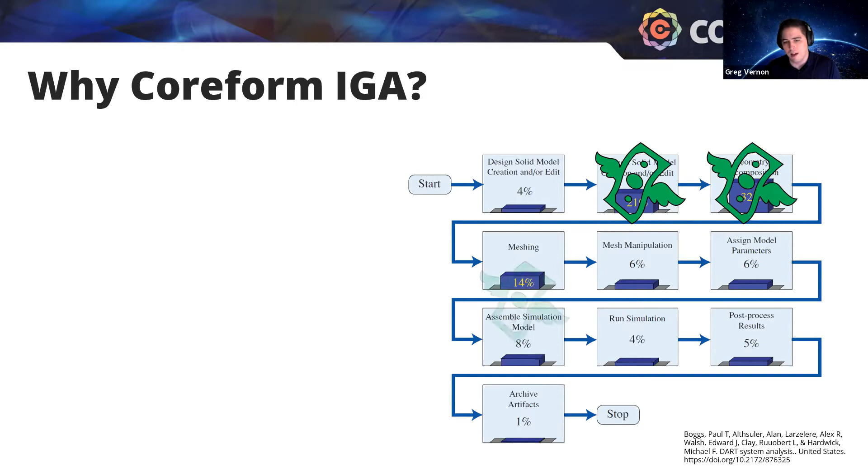They're taking a design model and then de-featuring it to make an analysis solid model, or in order to prepare it for hex meshing, having to decompose the geometry. Then the actual process of trying to build a hex mesh and iterating on that, and then making sure it's a quality mesh. So these portions of the pre-processing workflow really aren't value added—they're just time spent trying to get a simulation ready to go. IGA, and Coreform IGA in particular, our motivation is to drive those portions of the workflow to effectively zero, and let the analysts decide and have full control over how much time they actually spend in those parts.

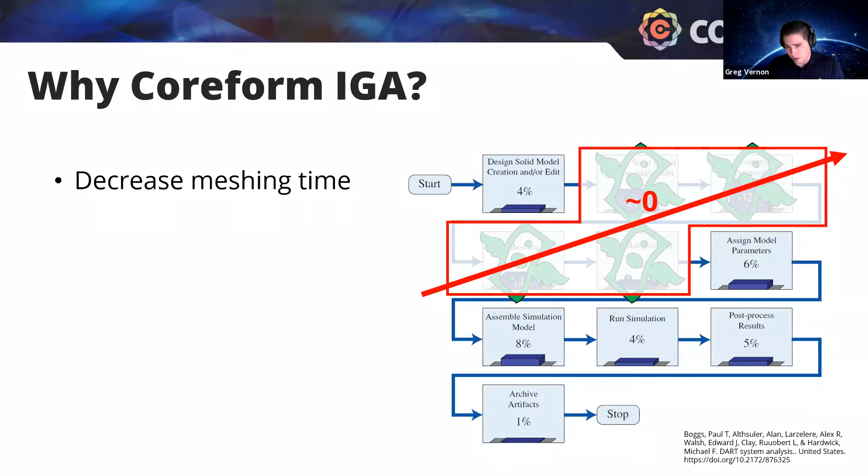One of the biggest ways we can do that is by decreasing the overall meshing time and relaxing the constraints that lead to those expenditures in meshing and pre-processing. We can do this largely due to technology Coreform developed that allows us to increase your simulation accuracy through spline basis functions.

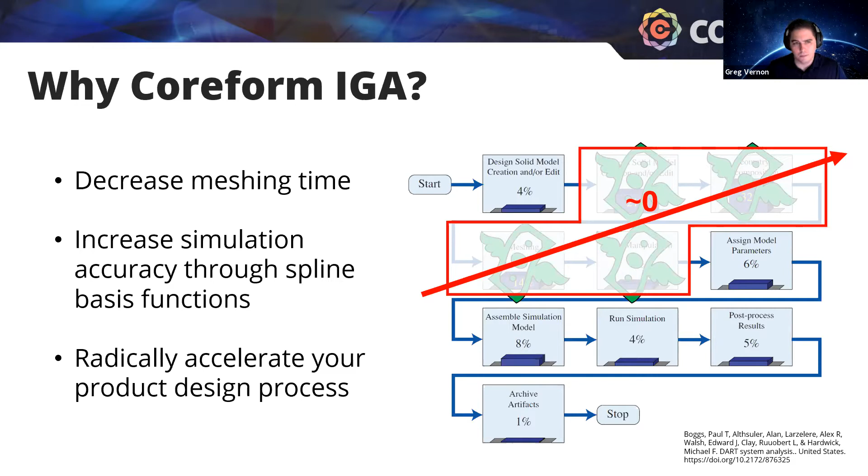And if you put all these things together, the real business value or goal is that you can radically accelerate your product design process. So really, Coreform IGA is about being a business tool.

If we look at where it fits within the realm of simulation tools, we can categorize solver technologies by their overall time to solution, being either slower or faster, and their accuracy, from low accuracy to high accuracy. There's value to having low accuracy in early stage design cycles, and there's also still value in having high accuracy.

If you look at the traditional finite element approaches, hex-based FEA versus tet-based FEA, hex-based FEA is typically more accurate than tet-based FEA, but it requires more time to get to a solution due to the manual labor required to build hex meshes. Tet-based FEA is faster overall, but it can be computationally more expensive, so it isn't as fast to go, and you give up some accuracy.

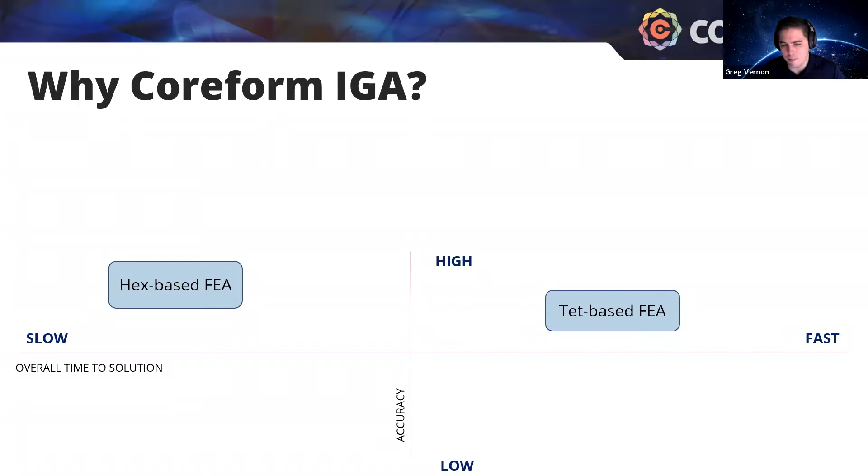We've seen recently more methods being developed, like meshless methods and voxel-based methods, that sacrifice accuracy in the name of more speed.

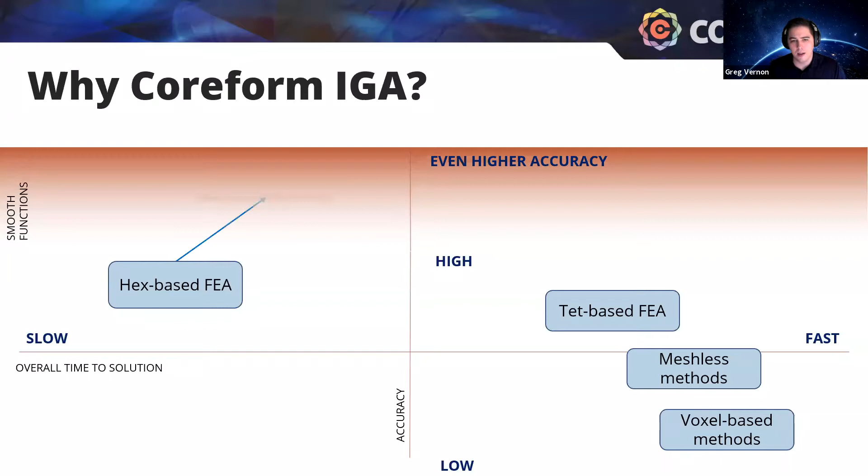Now, Coreform IGA is developing a tool with higher order smooth basis functions, which allow it to have even higher accuracy. With traditional body-fitted U-splines, which is our patent-pending spline technology, we can either take hex-based FEA and make it more accurate and faster to solve, or we've now developed these immersed spline technologies, which allow us to have the speed of meshless methods, but with the accuracy of hex-based FEA, or improved, in fact.

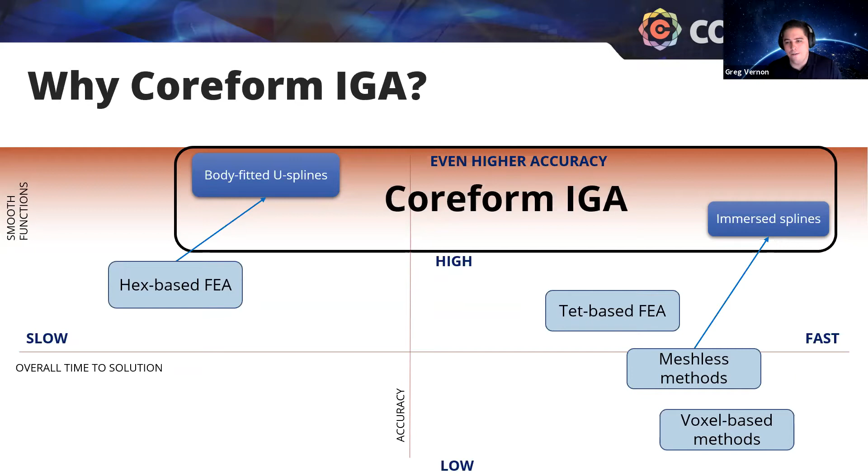So this is kind of the spectrum or location where Coreform IGA is designed to live in: highly accurate solutions that cover the entire spectrum, from a lot of model prep time for the most accurate solutions, to fast solutions with their immersed splines.

I want to dig into this spectrum a bit. If we lay it down, on the left we have traditional finite element approaches, which typically have more manual labor involved but result in faster solves for nonlinear problems. On the other end, traditional immersed methods have less manual labor, but the solves may be more computationally expensive.

On the left, traditional FEA with hexes requires manual labor to defeature. We'll see some fillets defeatured here, then decompose to put on a hex mesh. Traditional immersed methods just fully immerse the geometry without defeaturing, so here we can see these complex fillets and chamfers, and we rely on the computer doing some adaptivity and more work to get out accuracy.

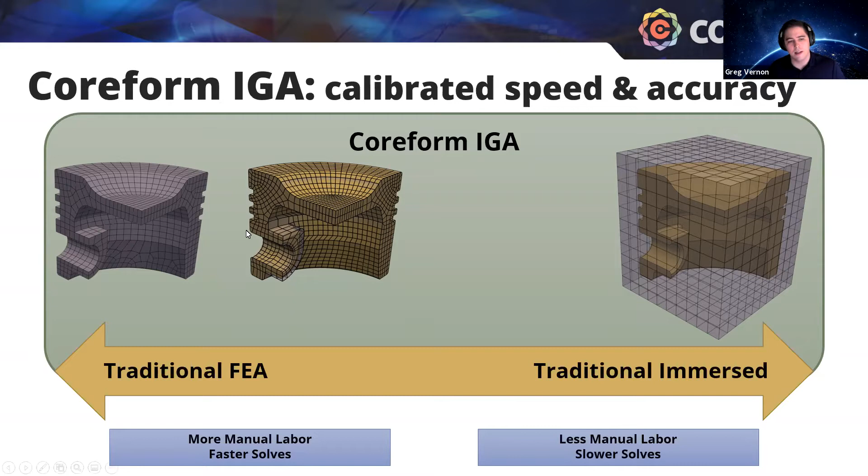What we've developed is the ability to identify the regions that are difficult to mesh, and only in those regions relax the requirement to be body fitted, while still being largely body fitted in most areas. Or, if an analyst chooses, we can fit just the major features of the geometry, in this case the symmetry planes, the top and bottom surfaces, and the outer radius, then allow the computer to adapt to get out the solution.

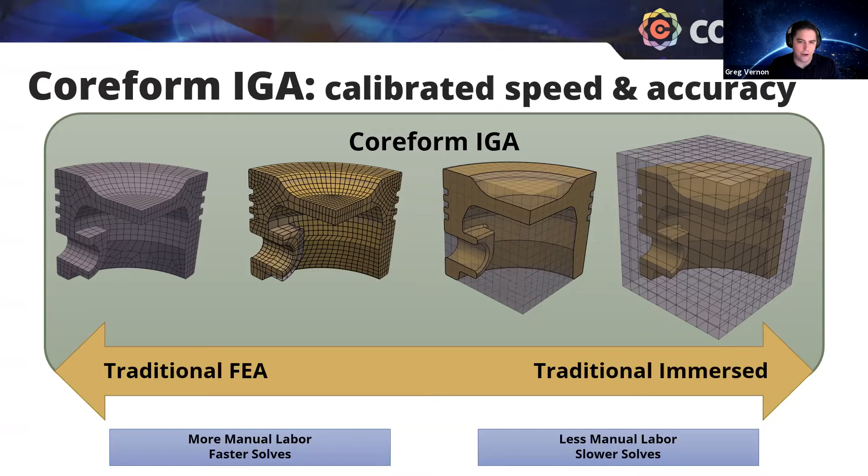So really, what we've done now is give the analyst the ability to choose, for each component in their model, what level of accuracy and computational expense they need to get out their solution. It's full flexibility provided to the user.

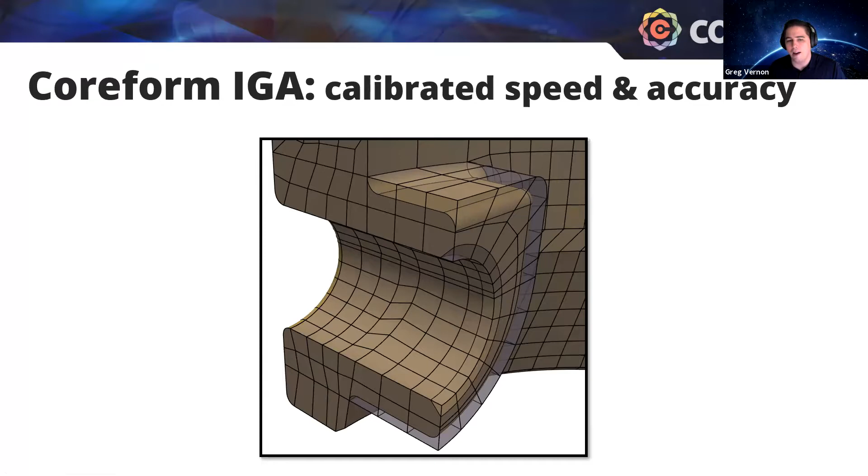If we look at that second option from the left, I want to show the detail where we are body fitted on most of this geometry. But what makes this geometry difficult, if not almost impossible, to hex mesh without defeaturing are these fillets, especially these complex fillets on the shoulders. So we relaxed the requirement of body fitting in those local regions, and use the local adaptivity properties of our U-spline technology to drive accuracy to whatever level the analyst requires.

And so, as you can see, with this approach, isogeometric analysis, we've now got this tight CAD connection to the design geometry. We've got greater accuracy per degree of freedom due to our use of spline basis functions, but also the ability to have partially body fitted meshes that are relaxed, immersing just certain regions. This results in more efficient compute. Overall, we've now calibrated, or allowed the user to calibrate, the speed and accuracy trade-off they need for their problems.

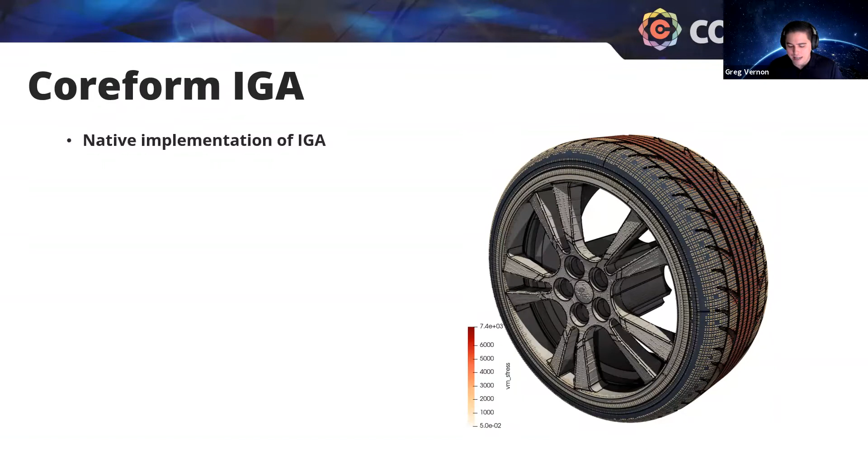Now, Coreform IGA is built on decades of research in finite elements and isogeometric analysis. It is still under development, but we're making great progress. So what I'm going to show you today is the latest updates we've done to Coreform IGA with our strategic partners. But I wanted to give you some insight to the current capabilities of Coreform IGA, but also a bit of the vision. So Coreform IGA is a native implementation of IGA, taking these decades of research and putting it into a native solver.

We support both linear and nonlinear solvers, static and dynamic physics, using both implicit and explicit time integration techniques. We support nonlinear materials, geometry, contact, and more nonlinearities are coming.

Some of the mechanical engineers in the world who have nightmares about Fortran might be happy to hear that our user materials and user subroutines are implemented in Julia. And then currently our input files are encoded in JSON, which is a human readable format and is highly structured.

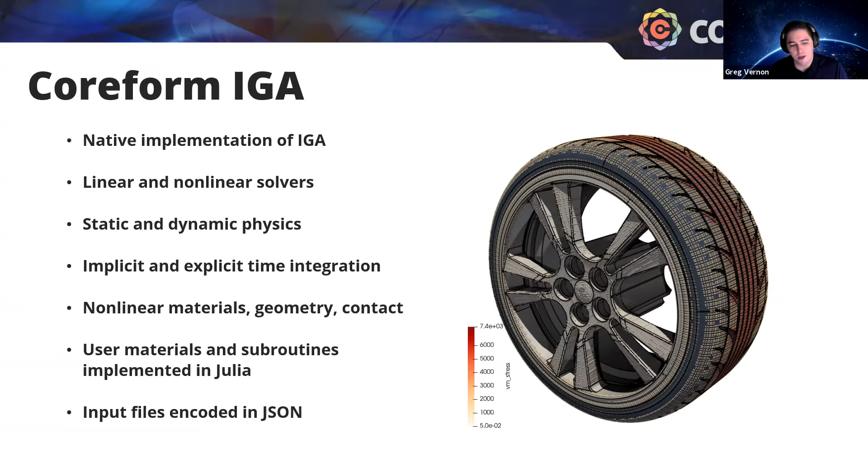So I'd like to, just before we dive into our demonstration of using Coreform IGA to predict failure, take a moment to see if there are any questions about what I've talked about so far. Matt, are there any questions in the queue? You can go ahead, Greg. Right.

Undergraduate textbooks typically allow you to have hand calculations, they're amenable to hand calculations, and then it allows you to test and verify against your finite element solution. So this was actually one of the first problems I ran when I was a new engineer with finite elements, just to make sure that I was understanding it.

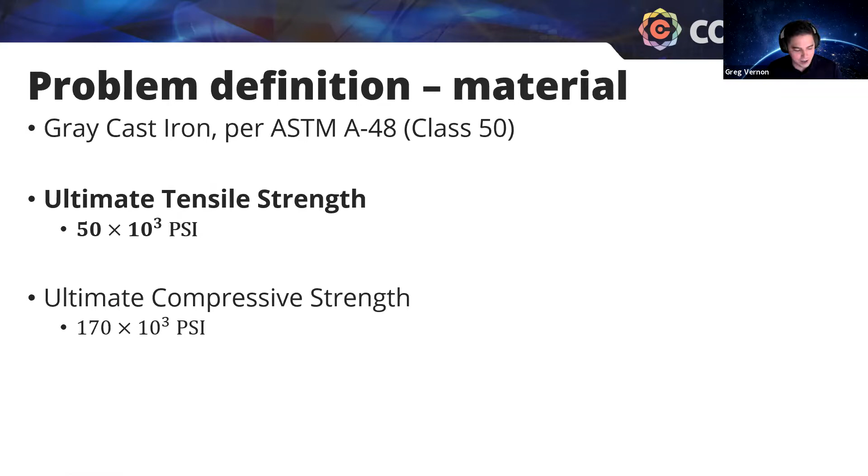And so, as I mentioned, we're using the gray cast iron here, which has an ultimate tensile strength of 50,000 psi. I apologize to our metric friends out there that I'll be using the English system for this analysis. Maybe someday we can all get onto metric for everything, but for today we'll be showing this in English.

Now, gray cast iron follows a brittle material failure. I don't have to remind everyone about this, but just to go through it: if you recall, brittle materials typically don't have a lot of plastic strain before they fail. So the ultimate stress is typically equivalent to the fracture stress, and that's usually very shortly after yield. And if you look at the max normal stress theory, we do see that cast iron does follow this model, whereby whenever the maximum tensile stress, or normal stress, exceeds the ultimate stress value, we have failure.

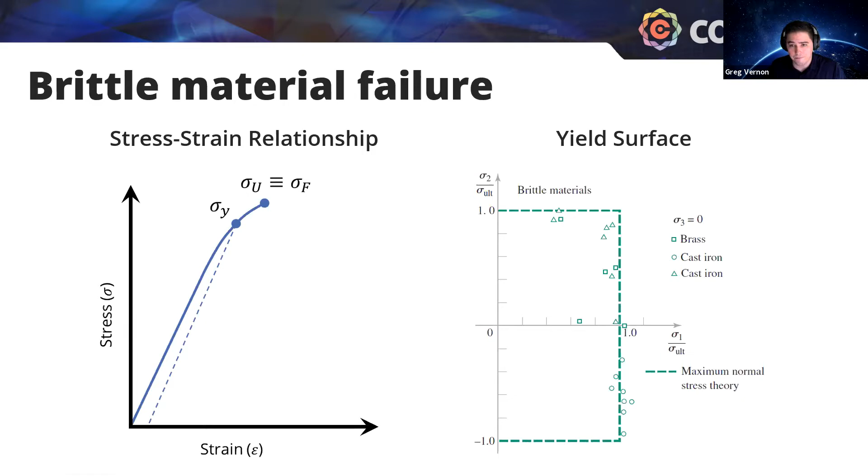So we're going to use the maximum principal stress here as our criteria for failure. And again, as I mentioned, this is a good practice for any engineer to do when doing finite element analysis: to also do hand calculations.

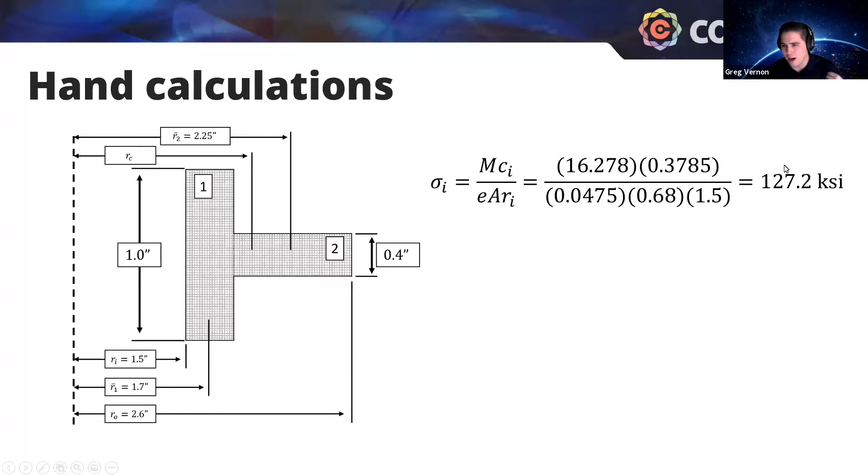As you can see here, even if you've been provided geometry with fillets, you'd still probably idealize it down to this simplified geometry of two rectangular sections. Then we can compute the maximum stress at this interior point through curved beam bending equations. We get 127.2 thousand PSI.

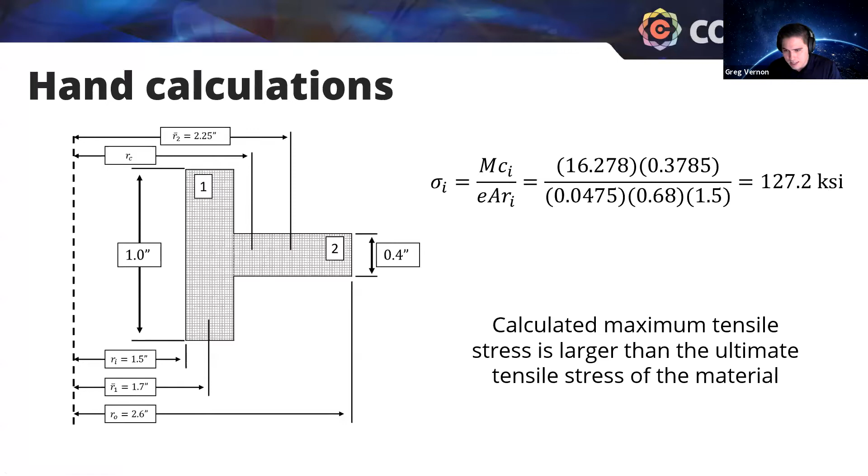Based on our previous assumption of gray cast iron, that maximum tensile stress is larger than ultimate tensile stress, and so we would predict failure. In fact, we predict failure by quite a bit.

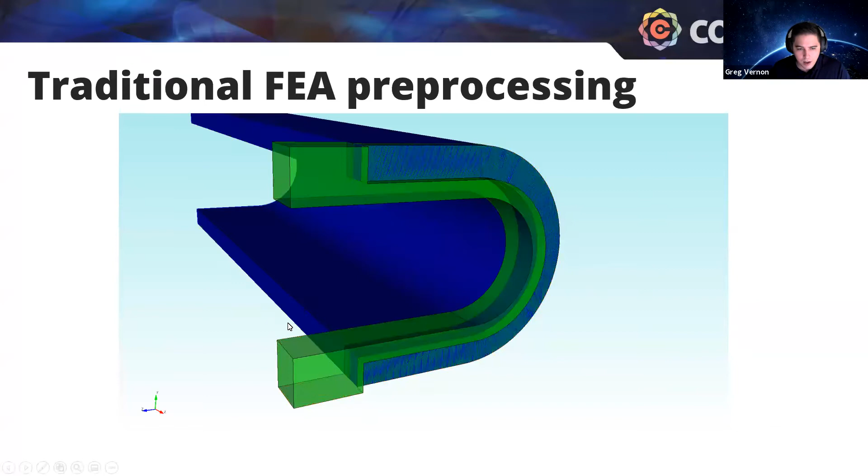Now, this is a bit of a contrived problem, but if we look at a traditional finite element approach to pre-processing this model where it's hex-based, this is representative of the pre-processing one would do: we start off by defeaturing fillets, the small features that don't matter, then decompose our geometry into hex meshable blocks. We can then put on a nice high quality hex mesh, and we'll be looking for stress on this internal surface.

Again, this is a simple model, but for complex models, this process, as Sandia's analysis showed, can take upwards of 80% of the overall time of a solution.

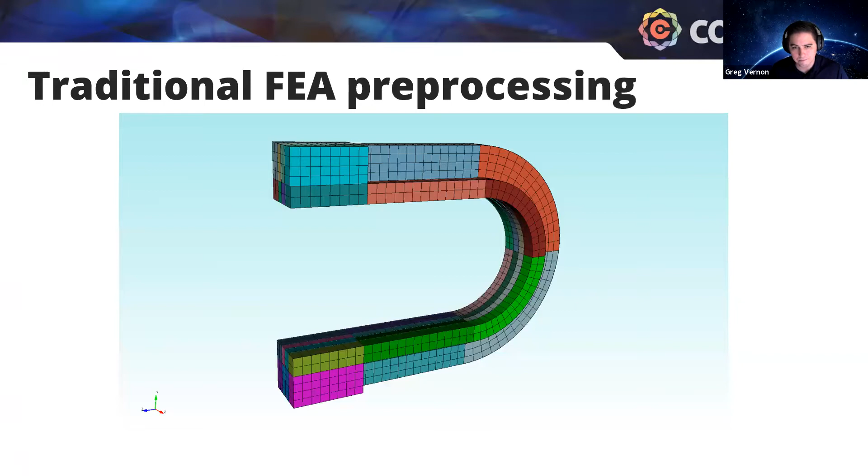Even with tetrahedral mesh generation, if you don't do defeaturing and you desire a coarse mesh, you can oftentimes have poor quality tetrahedral elements, which might be fine for a linear static analysis, but for nonlinear analyses can result in poor convergence as well as poor results.

But if you don't want to defeature, but want a quality mesh, then you end up with quite large finite element meshes in order to capture the small features in your geometry as well as the large features.

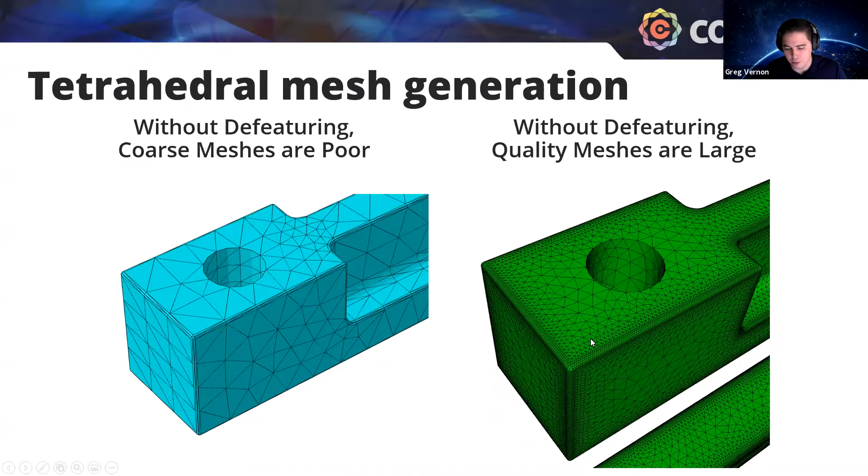Now, Coreform IGA, what we've done instead, if we recall that spectrum we talked about earlier, is take the CAD model as is without defeaturing, and build the mesh, or computational domain, that envelops that geometry.

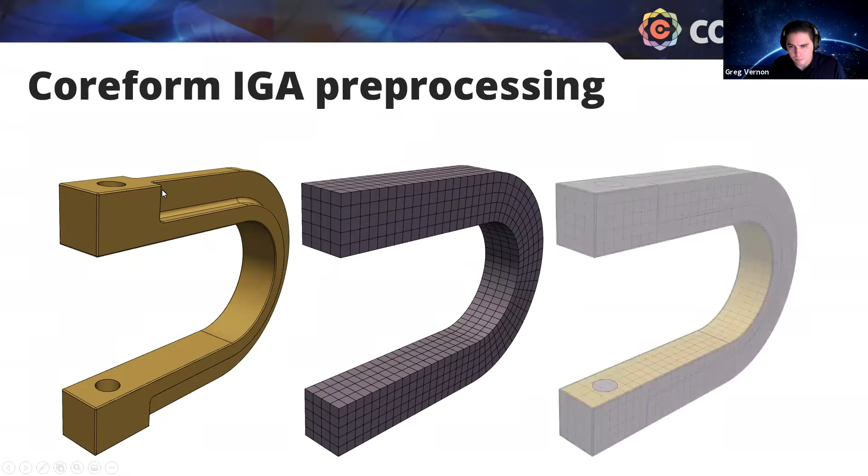And maybe in this case it follows the overall features or characteristics of the model, so we can approximate this as like a horseshoe, an extruded square that follows this shape. So now we've partially immersed part of our model, and body fitted on some other surfaces.

As a quick note, one thing you'll see throughout here, since Coreform IGA is still under development, is we'll be looking at quadrature points. So when we have cells cut by the geometry, we'll use adaptive quadrature on those regions, and you'll see these spheres in some of today's results — those are the quadrature points being shown directly as a result.

So as you can see with the linear Gauss quadrature, and also with cubics, you'll see even finer meshes of points. I just wanted to orient you that you'll see a lot of points in some of today's results, but it's not points in the same way as a mesh-free method like SPH or a material point method — they're just quadrature points, not actual particles.

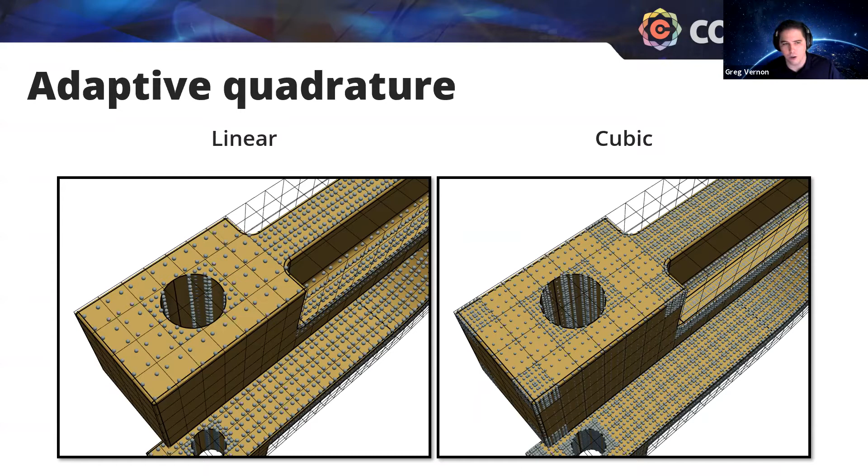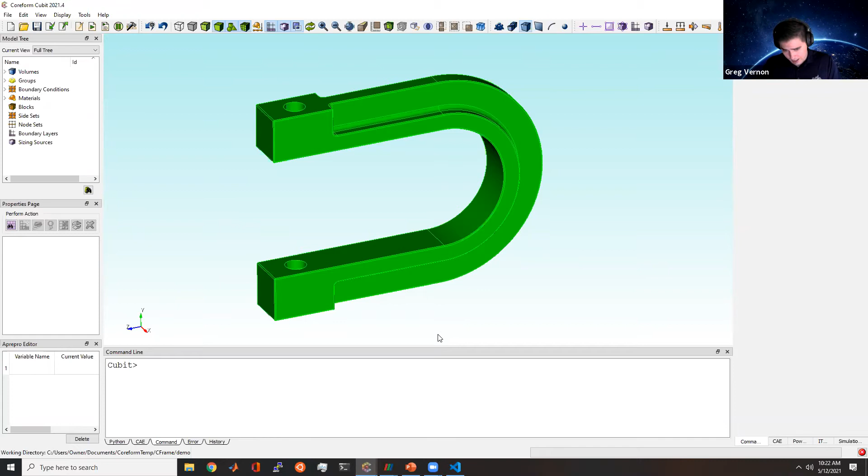Okay, so one of the other products that Coreform has is called Coreform Cubit, which itself has a long legacy of being developed at Sandia and the national labs. It is a world-class mesh generation software.

So what we can do here is we've imported our STEP geometry as is. What we're going to do is define, on the physical domain of our problem, some load surfaces on this physical geometry, not on the mesh. So what I'm going to do now is create some load surfaces.

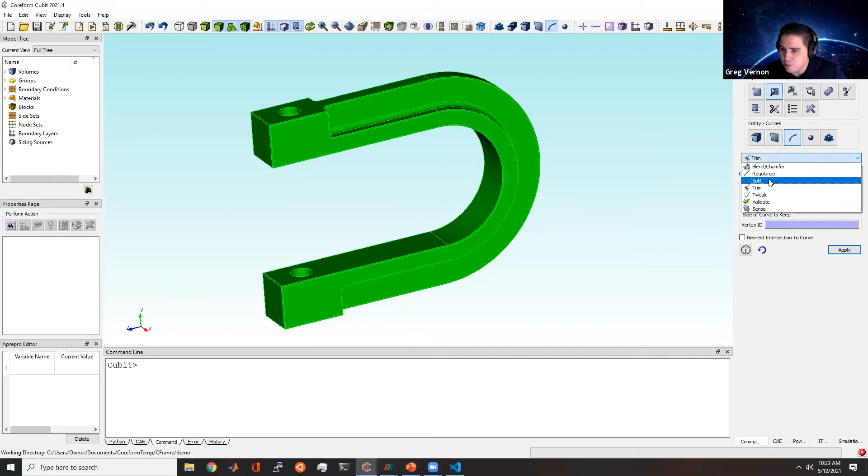To do this, I'm going to split these surfaces. Actually, first, let's split these curves. I'm just going to split the curves on this upper surface.

So that we have a region, you can see here now I've split this curve. Draw vertex so our vertices are visible. You can see I've now added a few vertices, and I'm going to split this surface through those vertices. So now I've got a surface in my physical domain with a CAD geometry that I can apply a pressure load to. I'm going to do the same on this bottom surface.

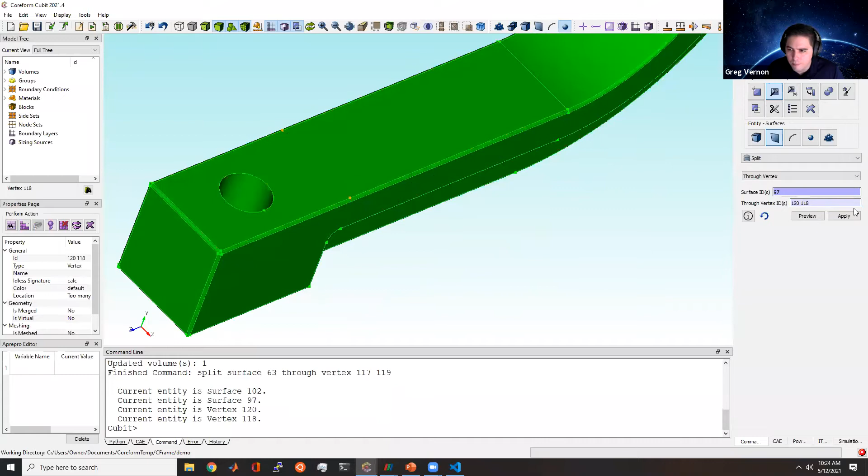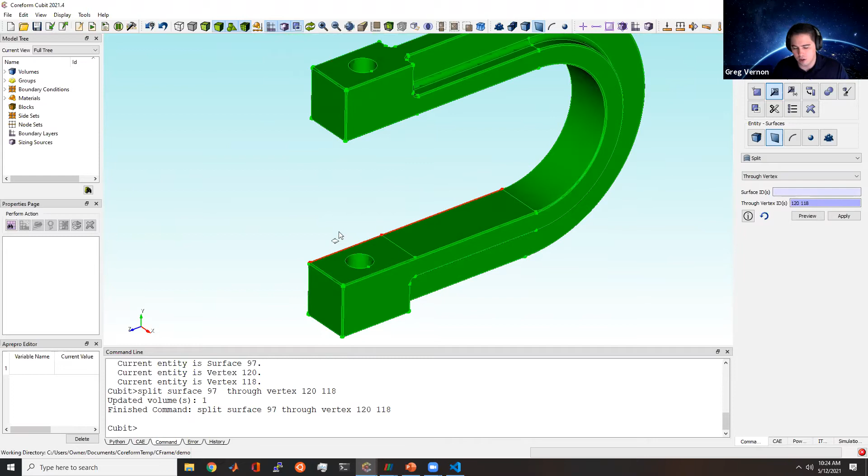Now what this means is that I could change the size of the surface if I wanted. I could have changed where this location was, but I won't actually have to remesh the mesh that we'll create. So we've kind of dissociated the needs of, or impositions of, how I'm defining my model, boundary conditions, and load conditions from the mesh. There's no longer this cycle of build the mesh, change the boundary condition, go back and remesh, change the boundary condition, go back and remesh. We've removed that part of the workflow.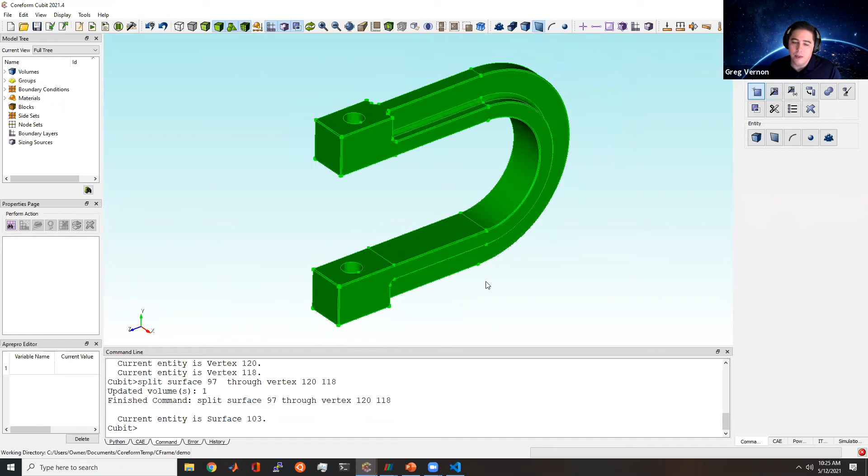Now what I'm going to do is start creating the geometry that's going to hold the mesh. I'm going to start by simply creating a bounding box, a tight bounding box of this C-frame. I could build a mesh just directly on this geometry, and I'd be ready to go. I could send this off for a simulation.

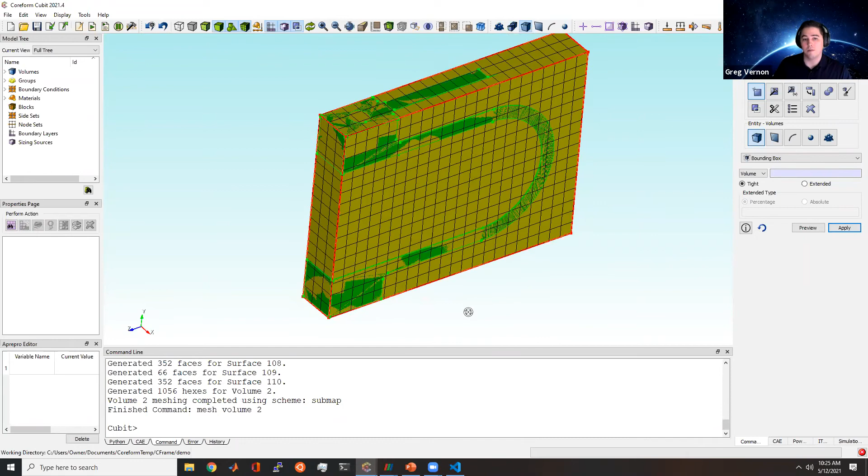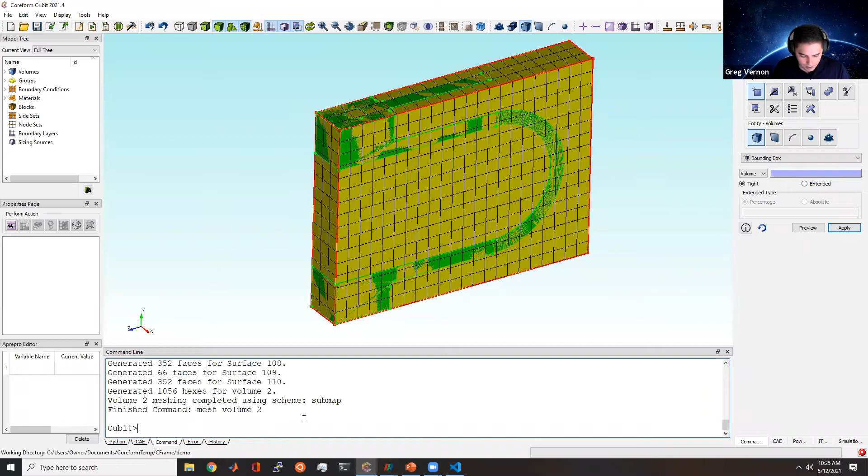So this is part of that spectrum. This would have required almost no time, I mean no time actually to create the mesh. I've only spent time defining where I want loads and boundary conditions on my geometry. But if we want a little bit more efficiency and accuracy per degree of freedom on these surfaces, where I had kind of intuited that I'm going to have interesting stuff, then I might want a slightly different geometry.

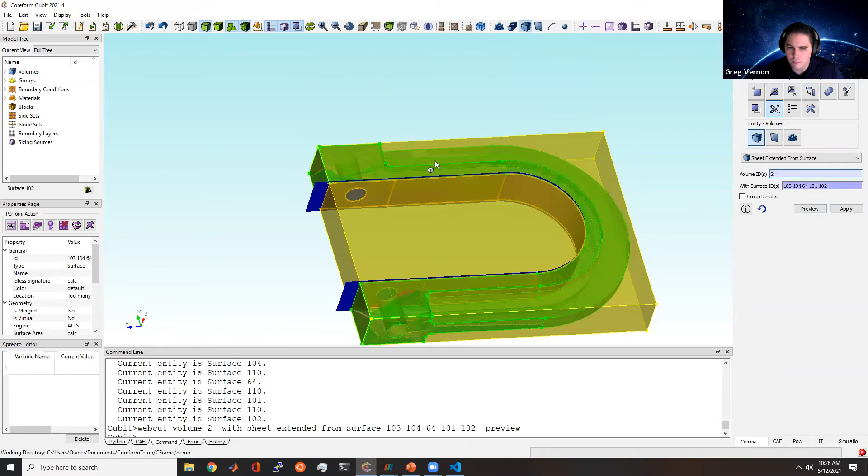So here what I'm going to do is cut this geometry by the interior and exterior surfaces. I'm going to select these interior surfaces of the C-frame. I can preview what this cut is going to look like in blue, so it's going to trim away this internal region. Now I've got two regions here. Now I'm going to delete this yellow volume, and now trim away these little regions on the outside here.

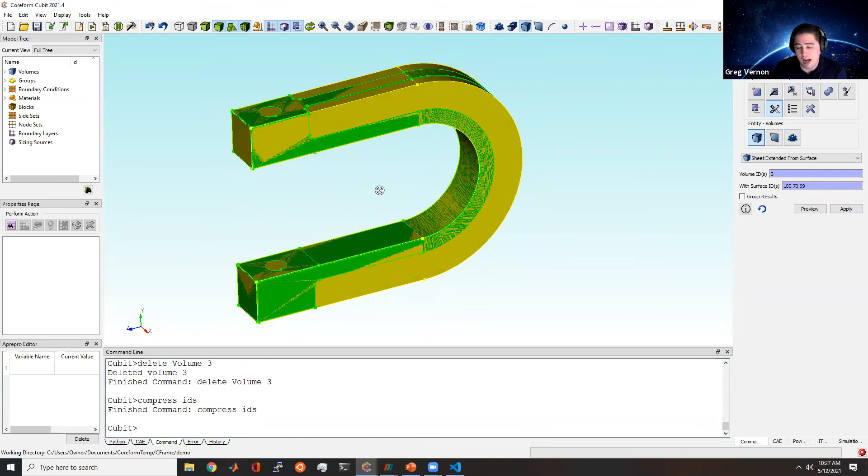So I'm going to do the same thing here: select these surfaces and make this cut. Again, we can preview this cut in Cubit, so you can see the little blue surface showing me what the cut's going to do. Now we can see the yellow volume here represents the domain, the computational domain, where I'm going to build my elements. I could just build our spline mesh directly on this yellow surface.

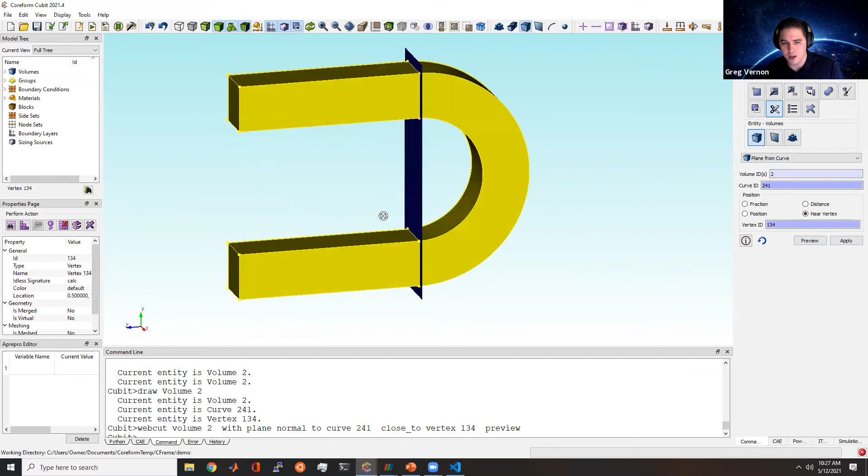Well, what I want to show is that this fits within Coreform IGA. It still even fits within traditional FEA workflows, and can still do things like web cuts. So I'm actually going to make a web cut here just to show that we can do this. I'm going to trim off these, make a cut on these rectangular prism sections, make this cut here, and then I can merge these volumes together for a conforming hex mesh.

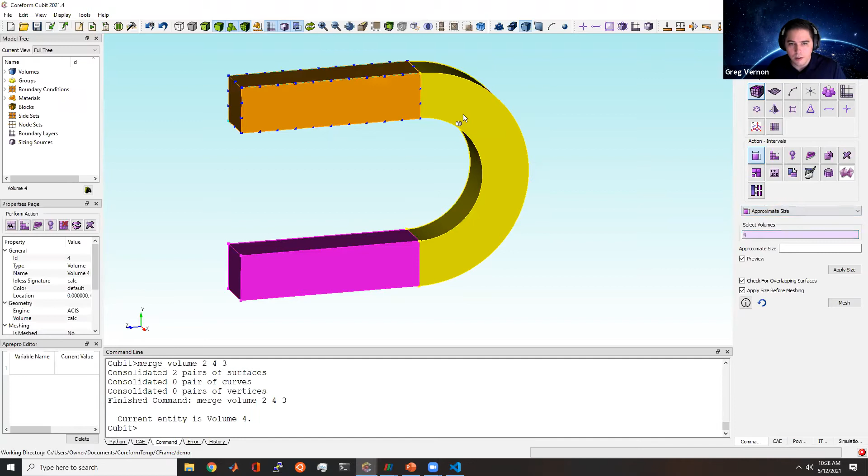And then I can specify, say, element sizing in Cubit. So I'm going to choose 0.5 for my element size. I'll show you what that mesh is going to look like, and then create a swept mesh on those volumes. So this is going to be the layout of my spline mesh, because we can see, this is just showing us the linear layout.

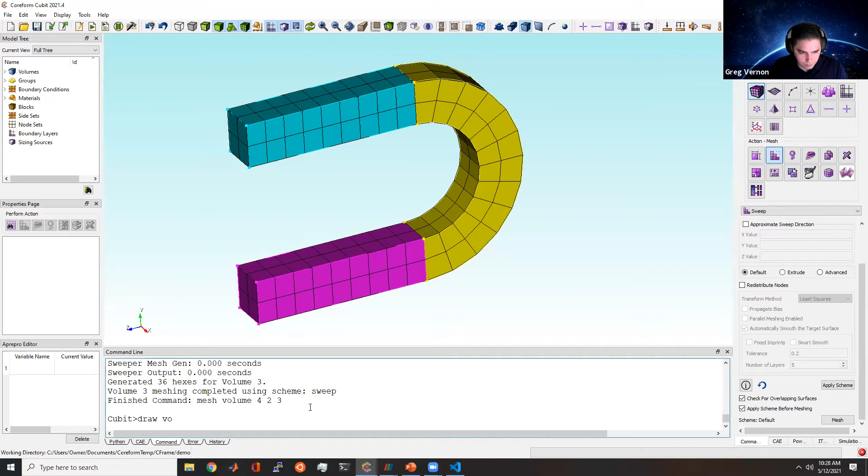That again immerses our computational domain, or sorry, our physical domain. And I can then build a spline. So this is a command that's coming into Coreform Cubit very soon, the ability to build splines. I can specify degree and continuity, so maybe I want to build cubics that are maximally smooth, and build that.

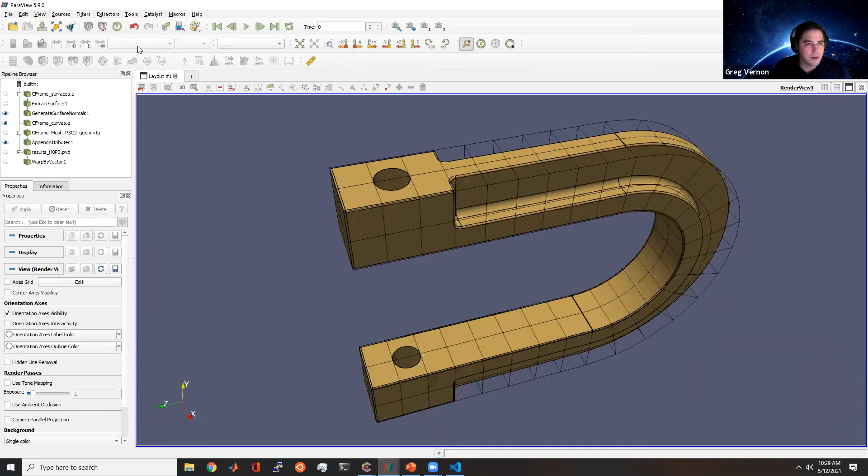Now we can also build a quadrature scheme. I've already kind of built these — I want to show, let's just draw these by solid color. So as we can see, as I mentioned, this is a cubic mesh. We can see then the adaptivity — you can see the outline of those hex elements that I built in the spline, and then the adaptive quadrature to capture the geometry that's been cut.

One thing we haven't shown here today is the ability to have further adaptivity of the elements to capture small features of the geometry we wanted. So we're just showing an unrefined, unadaptive mesh of it. But this is a mesh that I'll refer to later in the results section as the coarsest mesh that we ran with U-splines.

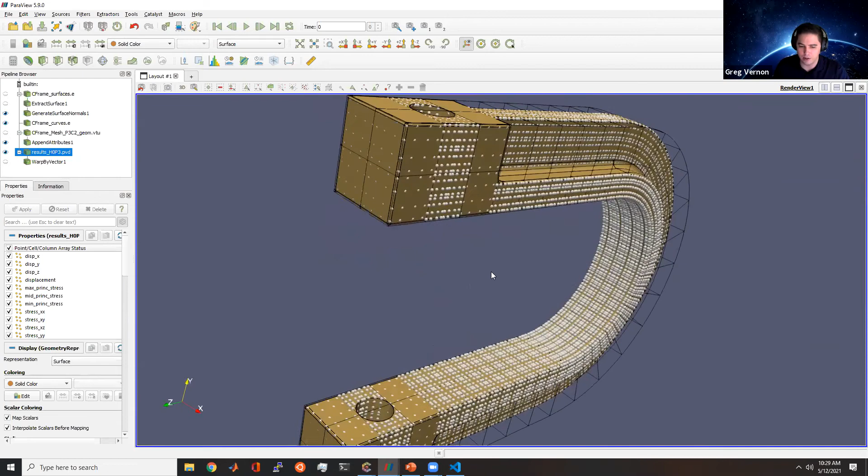I just wanted to orient folks to what this looks like. We have another command that actually constructs the quadrature scheme for this volume, and I can specify how many layers, how many levels of adaptivity for the quadrature I want. In this case, I could choose either one level of adaptivity or two levels, and I can save the cards. Then Coreform will go ahead and build that scheme for us, which I've shown here.

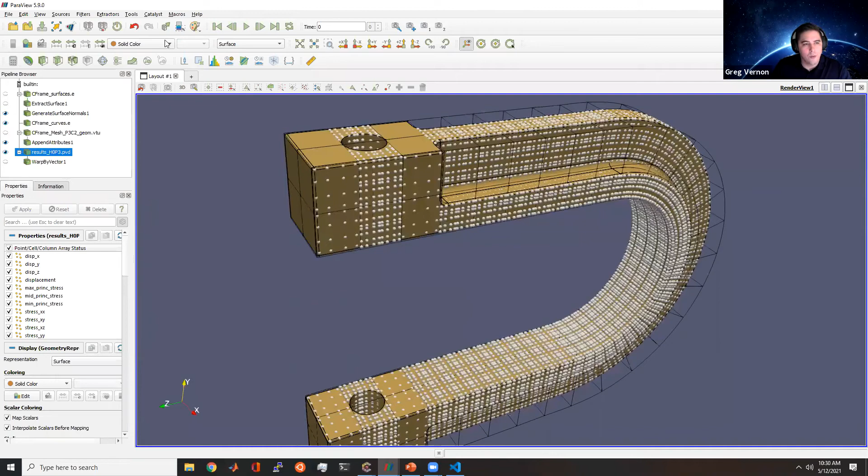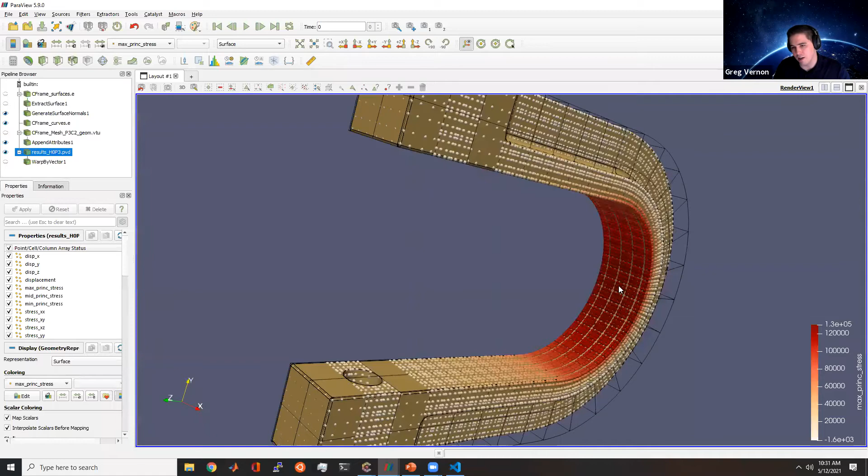We can then run this simulation in Coreform IGA, and we can extract out stresses, as well as this maximum principal stress. As we can see in this result that's plotted, here I'm plotting the quadrature points by their maximum principal stress. We can see that we're right about that 130, 127 KSI maximum principal stress on this internal radius here.

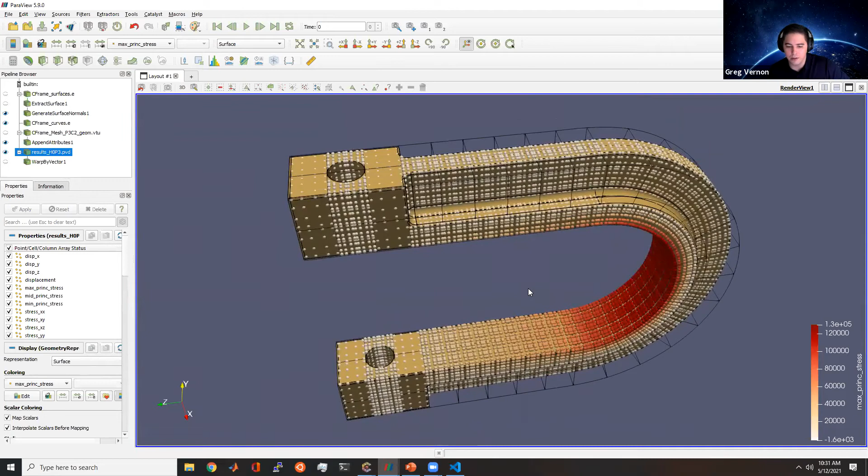Right, so that's the live demo. Are there any questions about this live demo, the functionality that I've shown here so far, before we actually get in and analyze the results? Yeah, we've got a few questions, Greg.

Would the immersed method be able to be extrapolated to larger assemblies, such that the analyst wouldn't need to worry about meshing each individual component on an assembly, but instead envelope the entire assembly with a representative bounding box?

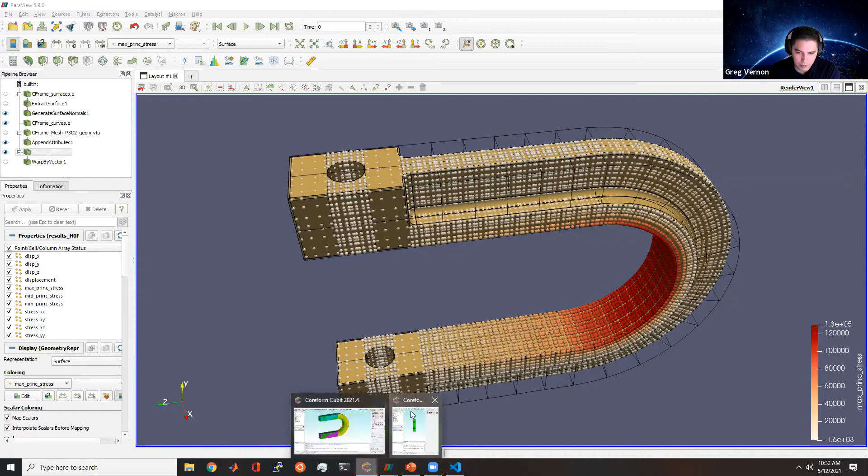Yes, that's a very good question. Mike can chime in on this, but what we would do for a large assembly is build a bounding box like this simplest bounding box that I built, for regions that you don't care about, if it's not critical, right? For a critical region, you probably want to have, if this was the critical component that if it failed meant there would be loss of life or injury, we would probably want to have the mesh that we've shown so far, where it's at least largely body fitted.

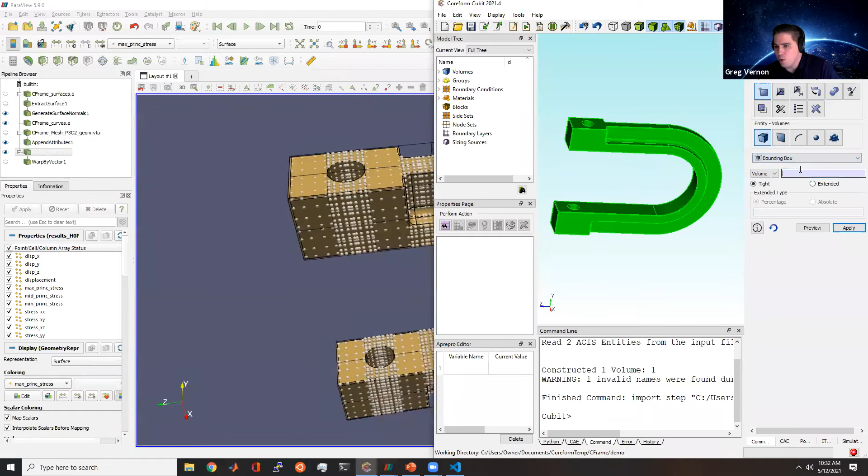But for regions that you don't really care about as much, what we would do is build a unique volume for each one. It's still trivial, but it's not one single bounding box or one single domain, but a series of simple or trivial domains. So you can imagine this assembly would be built of many of these. It's a very good question, hopefully that answers it.

So here's a kind of similar question. Would the bounding box approach that you're showing have a faster solution time compared to hex meshing? Yeah, so we haven't yet been able to really compare in terms of total time.

What I will say is that what's valuable with the approach we've done here today is that when you take a geometry and when we defeature it, let me maybe draw volume 1 here, right? This geometry is almost impossible to hex mesh. We might do a challenge at some point and offer a prize to whoever can build a fully conforming body fitted hex mesh on this volume. So again, the typical approach is to remove or defeature parts of this model.

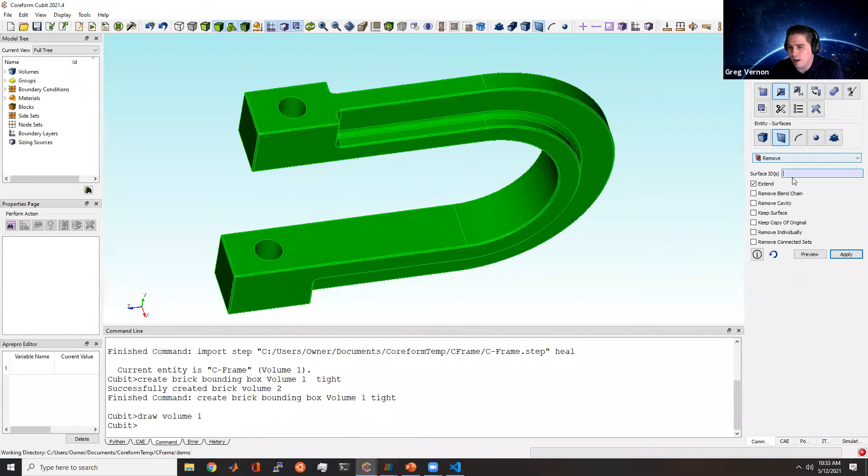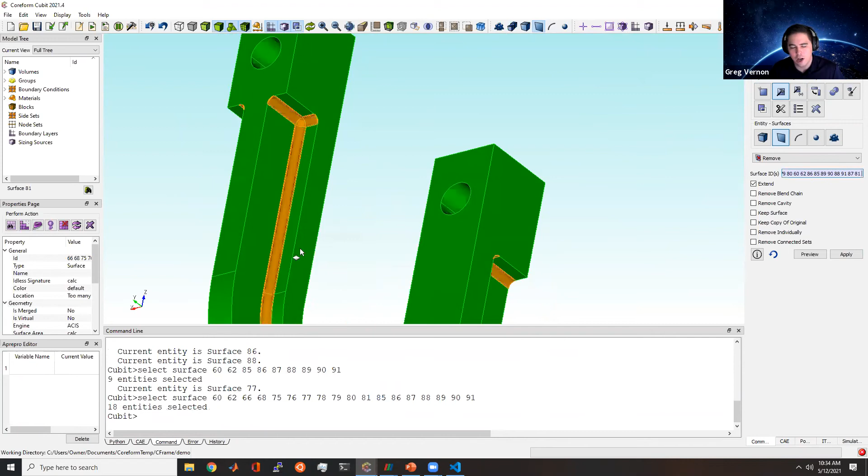So here I might, this is probably an okay defeature, but even if I remove just that fillet, this fillet is even a challenge. And so you might even come to the point where you're removing these fillets. So from a convergence standpoint, you're no longer converging. You've changed the problem definition by doing this defeaturing, and so to some extent you're solving a different problem.

But I would imagine that if you just look at the total time, the actual compute speed, the hexes might be faster in this case than the bounding box approach. They might be.

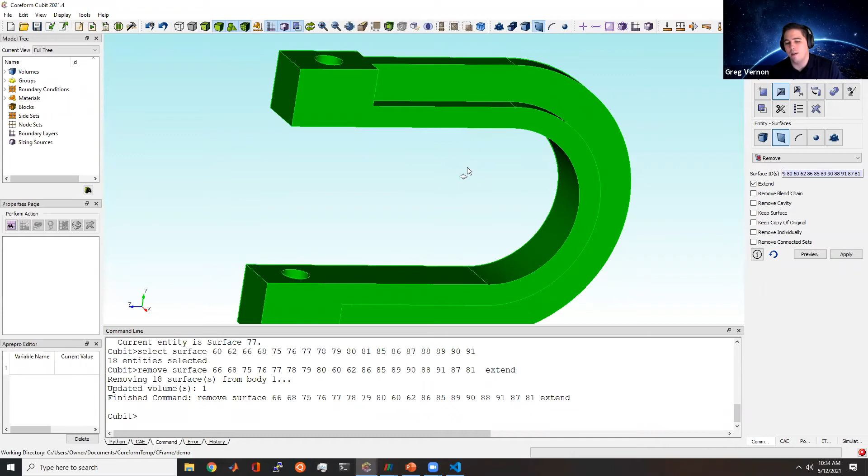But they're linear, so to get the same level of accuracy, I would surmise that the bounding box approach would be much more efficient. I've got some examples of the convergence rates for the horseshoe mesh that might help show why I'm making that claim. But we don't have a concrete answer yet for the bounding box approach. By being able to use high order basis functions, I would imagine that for the same level of accuracy, the bounding box approach would be much more accurate and faster.

Thanks, Greg. Let's go one more question, then I'll let you push forward. Okay, this is from Eric: can contact happen within a bounding box as well as between parts in different bounding boxes?

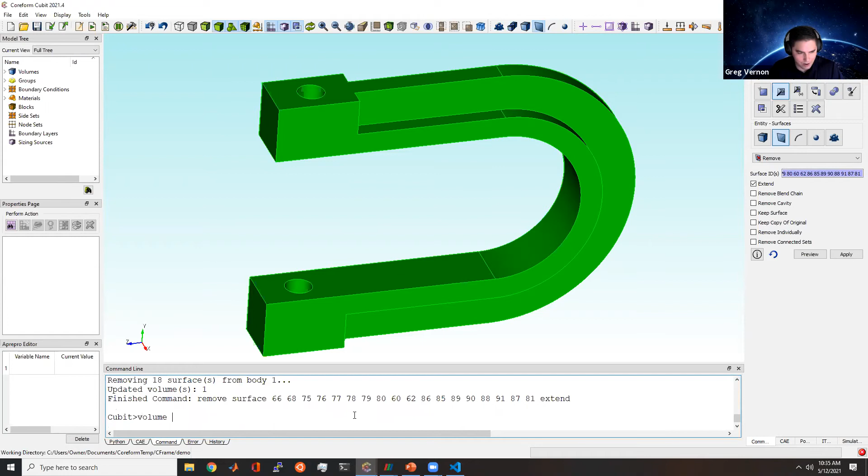Yes. If we think of the bounding boxes like self-contact, we draw a volume. So in this bounding box, if we had compressed this, we could have contact between these interior surfaces—those could come into contact with each other within this bounding box. We could also have contact if we had two of these together in their own separate boxes, and maybe they're linking together—we could have contact between those parts of the assembly. So both approaches to how we would do contact do work.

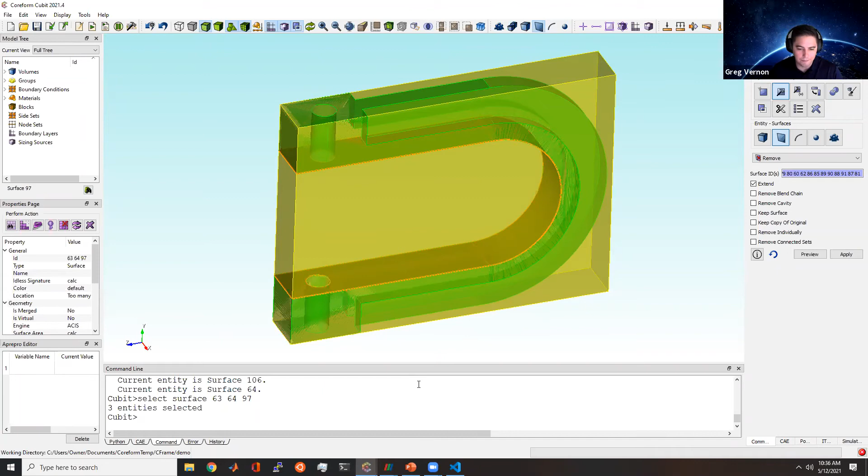So if we now look at the results, I've compared a traditional finite element solver. These color maps are on the same scale—both have the same color for 0 and the same color for the maximum stress, so they're at the exact same scale. Coreform IGA on the left, this is a cubic result, and we're looking at the maximum principal stress. You see these have very good alignment in the results. However, this mesh is actually the finest mesh that we did for the traditional FEA, as we'll see on the following slides.

So I think there's something like the element count—there's just shy of 1 million elements in this solution on the right, and about 1,000 elements in the solution here on the left.

So what I've done here is look at the results, the convergence of stress. Notice that, just for guidance, I've put in where the hand calculation is at. Recall the hand calculation doesn't have a material assignment because it makes the assumption of no deformation, so we don't expect these to converge to the hand calculation, but the key is that they're in the ballpark. The fact that the hand calculation is closely aligned with our FEA results gives us confidence in our FEA results being correct.

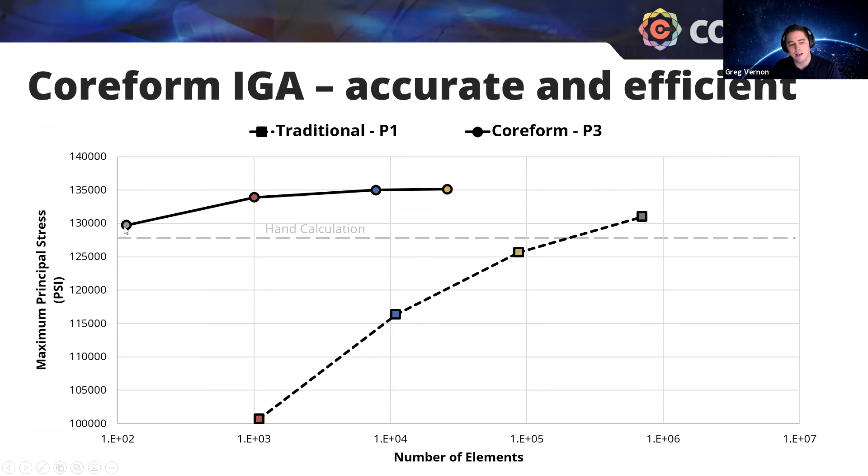And then I've colored these different boxes by trying to build roughly equivalent meshes between the traditional finite element approach here with the square boxes and the Coreform IGA results. You can see I ran a very coarse mesh, the one I showed at the very beginning, with Coreform IGA, and it's almost as accurate as the finest traditional mesh, which I showed just previously. So this finest solution here is almost the same level of accuracy as that very coarse mesh that I showed with IGA.

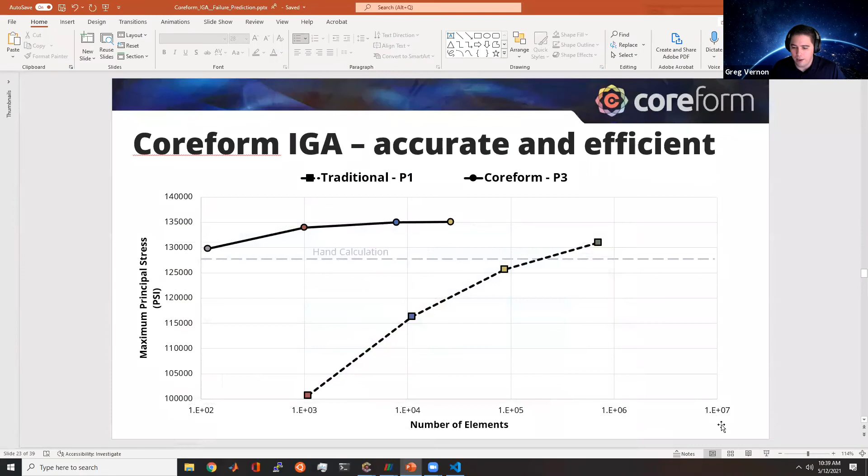And then what we're really managing—we're looking at element counts here, but if we look at degrees of freedom, that's maybe even a clearer picture. Degrees of freedom are really how expensive it is for solvers to solve it. I think again we can see that for the same amount of degrees of freedom, we're much more accurate. And what that means is that we can have much fewer degrees of freedom and get a similar or same level of accuracy.

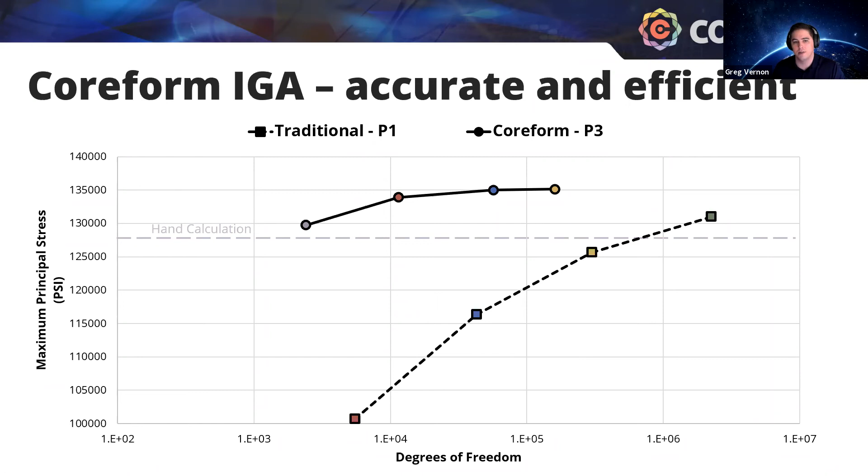So that's without any adaptive elements or adaptive use line. We've only used this adaptive quadrature on the base mesh. So even the tight bounding box approach can yield accurate solutions.

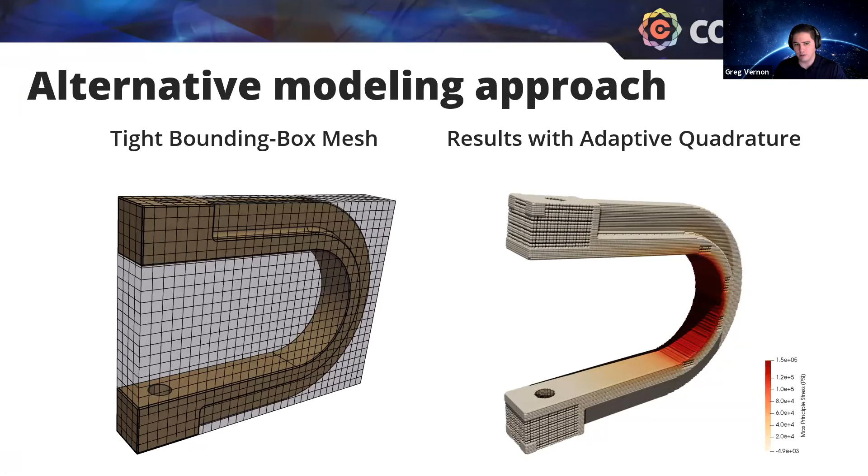And again, we have this period where the material begins to yield, continues to yield through an ultimate stress, until it finally eventually fails due to some fracture criteria or something.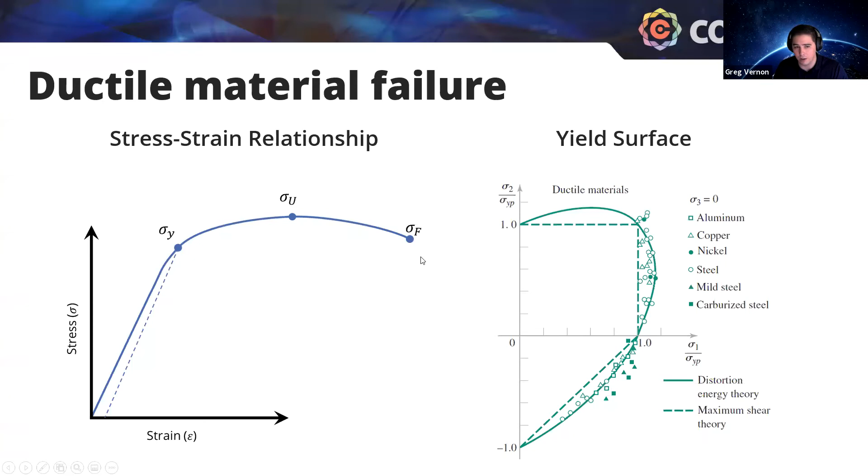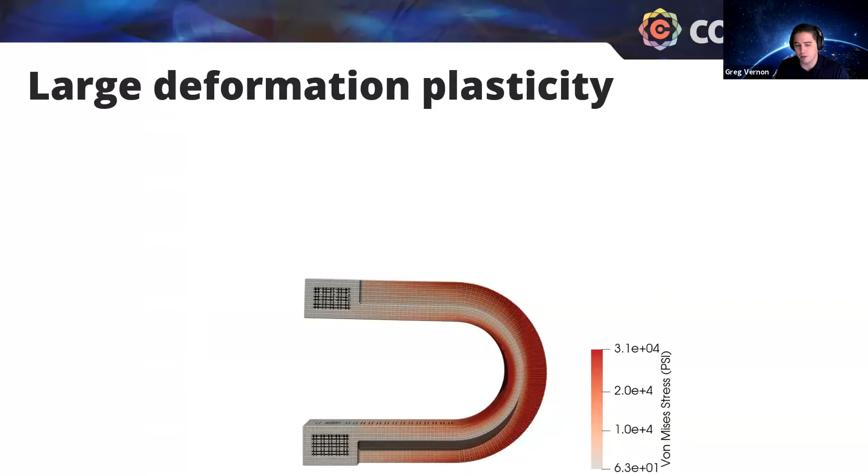In this solution, I'll just pause on the very last frame here. So again, even with the immersed mesh, smooth splines, we've still been able to capture and converge well on this large plastic deformation process. So of course we predicted that failure has occurred in this model, based on the fact that this part has yielded and is no longer serving its purpose.

So I do want to make a couple of comments here. Of course, for this problem, we probably didn't need to use FEA for this specific case. That's because this problem was from an undergraduate textbook. It was meant to be intuitive and easily adaptable to hand calculations.

So really, this problem is more useful for verifying that you've got a grasp on how to use FEA, how to apply it. But the real point is that FEA and Coreform IGA are necessary for many complex assemblies where it's not necessarily intuitive what your loading conditions are or how your geometry results in certain stresses.

You might still be able to do a hand calc, but you may not even know how accurate your hand calculations are. So you're really using FEA or Coreform IGA to help give confidence even to what you might be doing with hand calcs.

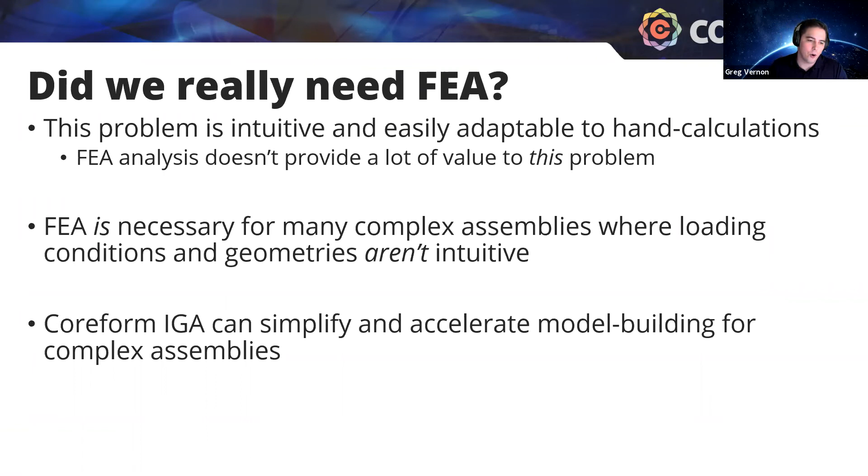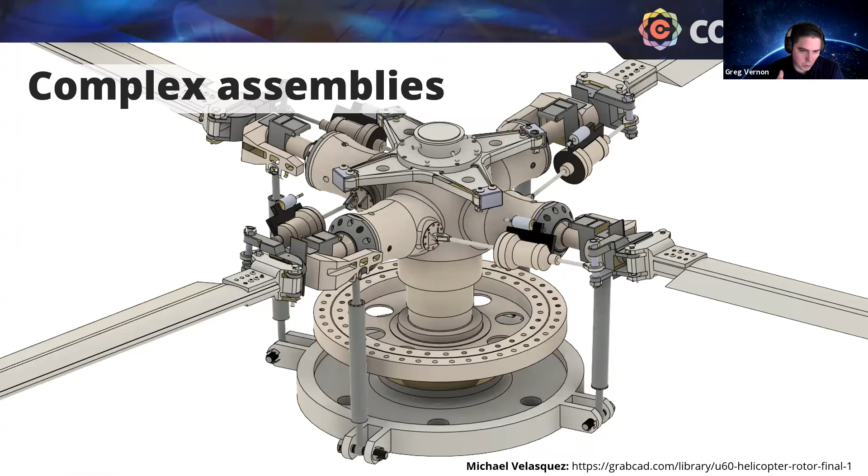And then Coreform IGA for those complex assemblies can simplify and thus accelerate your model building. For instance, this is a model from GrabCAD that I pulled - if you had a complex assembly like this helicopter rotor assembly, it may not be obvious what the stress on this fillet might be, or what kinds of dynamic loads you're seeing in some of these members, and what the loading paths are. So having an easy, simplified approach to building a mesh that still gives high quality, high accuracy results is valuable.

So just to summarize, the real motivation for Coreform IGA is to accelerate your design cycles. This can speed up the development of your products and processes, shorten your time to market. And it does this by simplifying your model building. It also allows more engineers to participate in performing these predictive simulations by not having to be experts in building hex meshes.

By simplifying model building, you can reduce your labor costs, which can allow you to either do more simulations for the same cost, or solve more problems and products, or do the same set of simulations but for less cost. It also eliminates geometric errors due to defeaturing, which is one of the primary sources of errors in finite element simulations.

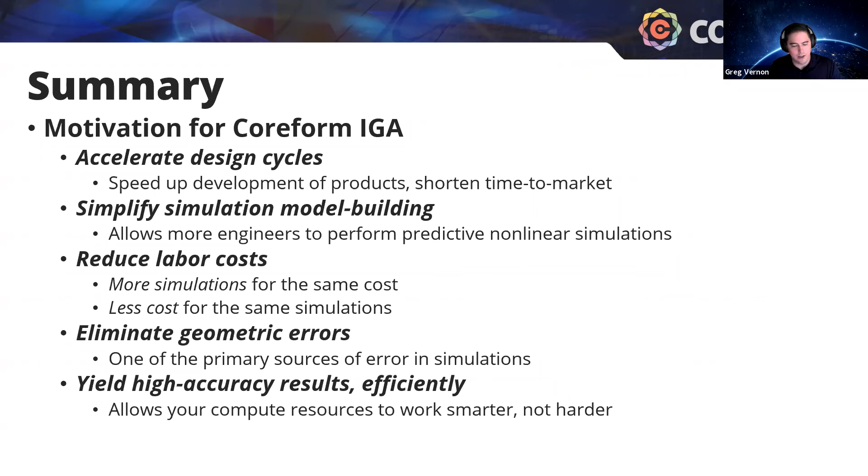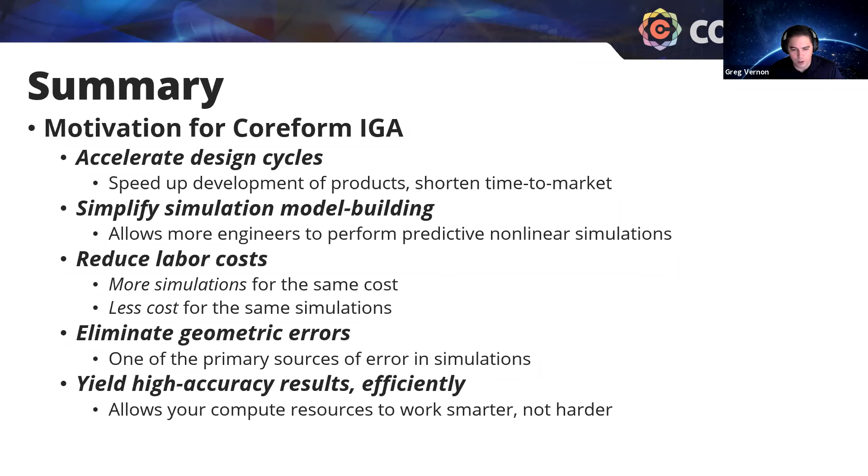And it can do all of this while still yielding high accuracy results, but efficiently. So you don't have to have a supercomputer to solve these problems, because we've reduced the amount of degrees of freedom that you need to get high accuracy results by orders of magnitude. And so let your compute resources work smarter, not harder.

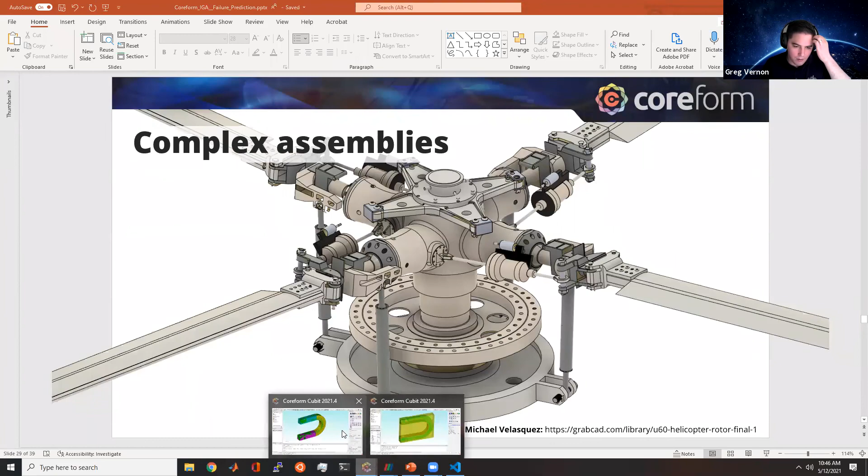Let me see if I'm understanding this correctly. Are you talking about the concave notch? Are you referring to like the fillet, like this? I think the question is that geometry is not the same as the coarse mesh you have, so how do you capture the simulation?

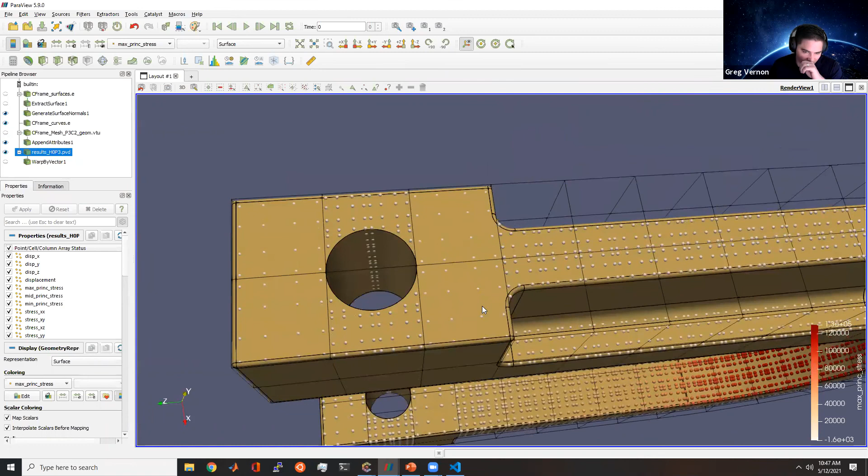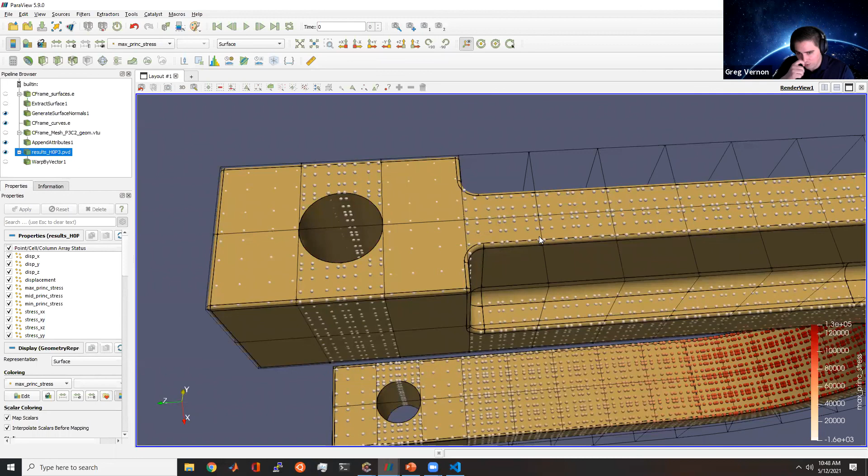The way that we capture this is that we have fictitious domains where there's no volume, and we have the real domain where there is volume, and then we're using our high order basis functions plus that adaptive quadrature to accurately capture the fact that we've transitioned from a solid region to a fictitious region or a void. That's how we're capturing this. Our method is largely a generalization of the finite cell method, which is a finite element approach, so if you're interested in reading up about finite cell methods, that would be good background. You really can't do this without high order basis functions, like cubics or quartics or higher, and this adaptive quadrature to accurately integrate those functions in the physical domain. So that's how that's captured.

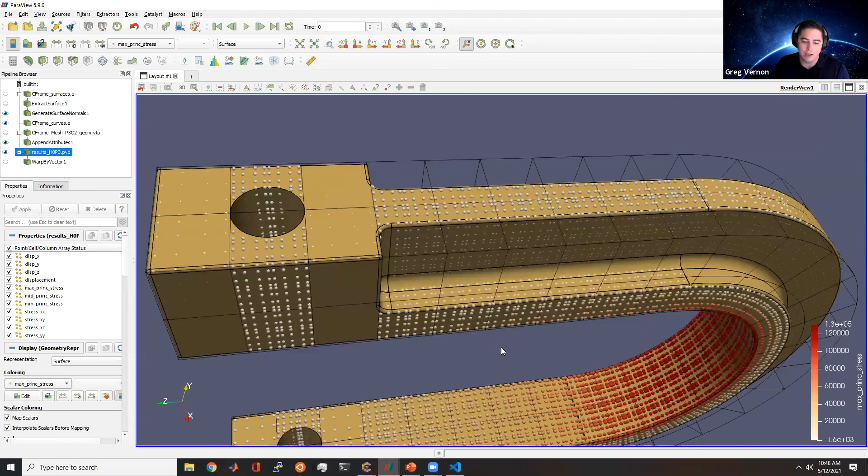It's one of the things I think is kind of funny that we always talk about it as a finite element approach, but really the real workhorse of a finite element approach is the basis functions. The basis functions are actually what are defining the solution. So really what we need to do is just be able to integrate the basis functions in the physical domain, and we don't really care about the elements themselves. The elements are just a scaffolding to prescribe a layout of basis functions and a layout for quadrature. But elements really aren't the first class citizens in the finite element method - it's really the basis functions.

Thanks, Greg. Here's a question from David: are thermal fluid solvers also under development for IGA?

Thermal solvers are. We don't yet have any customers who have been working with us on fluid solvers, but we certainly could build a fluid solver as well. Currently our primary focus is on structural mechanics problems - things like solid mechanics, contact, coupled with thermal mechanical as well. Those are kind of currently our core base of physics, but we do intend to expand our physics capabilities as customers have needed them.